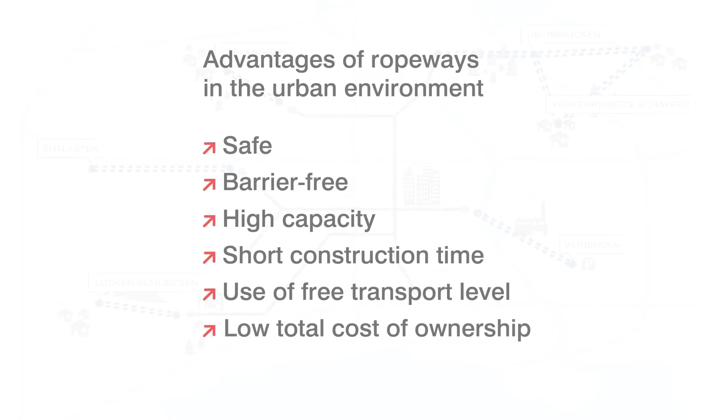Teraz przejdziemy do prezentacji dalszej.

Another dimension of urban mobility. Let me explain what we are doing at Doppelmayr in the cities. Doppelmayr's board was convinced to create a new team especially for urban installations, to trigger this business, because we are convinced that this will be the future. Right now the turnover is about 10%, and we hope to increase this number. Of course, it will never be the main market for our business.

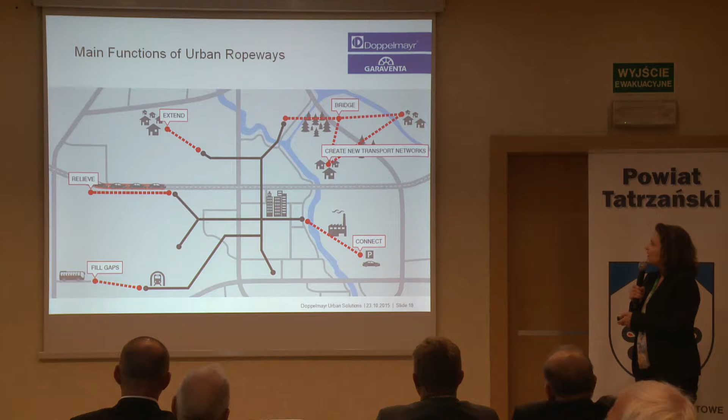One big advantage is the new level. We work on a different level. The ground levels in our cities are congested, so we move from level zero to the first level—a free level not used by other means of transportation.

Another very important advantage is the short building phase. Let me give an example: in London, construction took 11 months. When my colleagues first looked at the site and started planning in Austria, that was 2 years before the system opened. It's a really short construction phase, which politicians like because they can show infrastructure realized within one term.

Another absolutely important thing, one of the key elements of urban transportation, is accessibility. A means of transport in cities has to be accessible to all passengers—not only the sporty, young ones, but also people who are handicapped, a dad with a stroller, old people—and that's where the cable car is a good means of transportation because it's barrier-free.

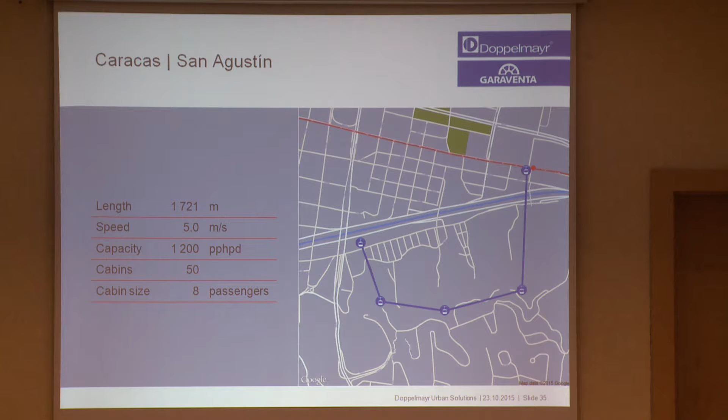Three years after, the government approached us a second time, and they wanted to extend the metro. The red line is the metro, and here we have a cable car going up the hill, really steep, from Palo Verde, that's the metro station, to the Mariche neighborhood up in the mountains.

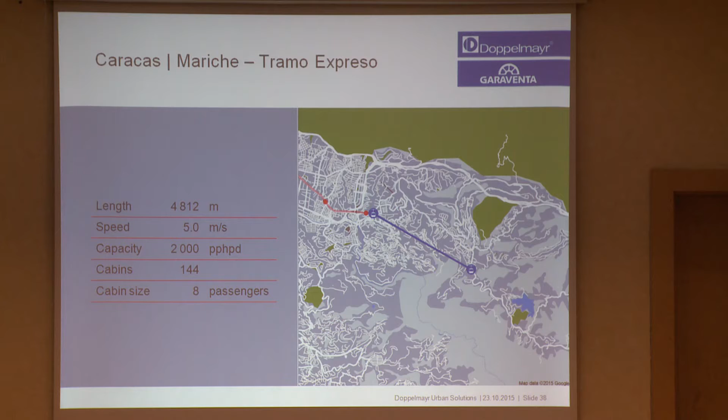Again, a very poor neighborhood. You can see it here, it's really steep. There's a road there, but it's always congested, and I was told it took people two hours to get there in rush hour.

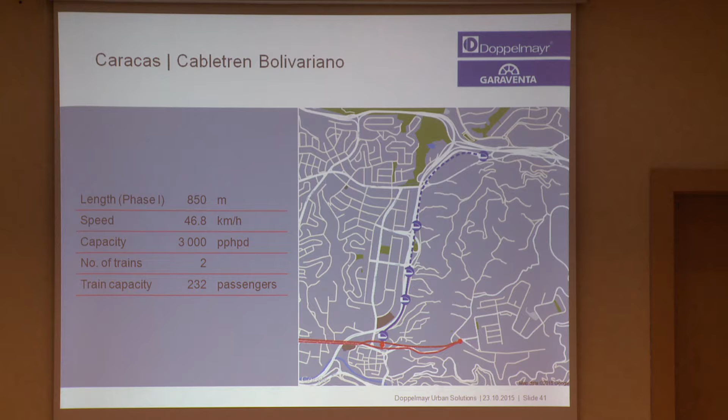So you can see here, you have seen this train in the movie. It plays an important role.

They wanted, actually, first they wanted to have an underground there, but then they realized the soil is not good enough. So the city decided to have an APM solution. It's basically the same technology as a gondola lift, but the ropes are underneath.

Another picture here. You can clearly see that the cable installations are integrated into the transportation network.

Next we go further down in South America to La Paz. La Paz is for us a really important step, because there we created a whole network of cable cars. For the first time in history, the cable car is the backbone of public transportation. This means that there was no infrastructure at all, and probably you know the situation in La Paz.

La Paz is in a valley, and the other city on top of the hill, a big city where the airport is, is called El Alto. El Alto is really poor, and La Paz is, let's say, the whiter, richer part of town. So these are two separate towns, and when Evo Morales came into power, he wanted to connect these two cities better. Since there was not much space on the ground, the only solution was a cable car.

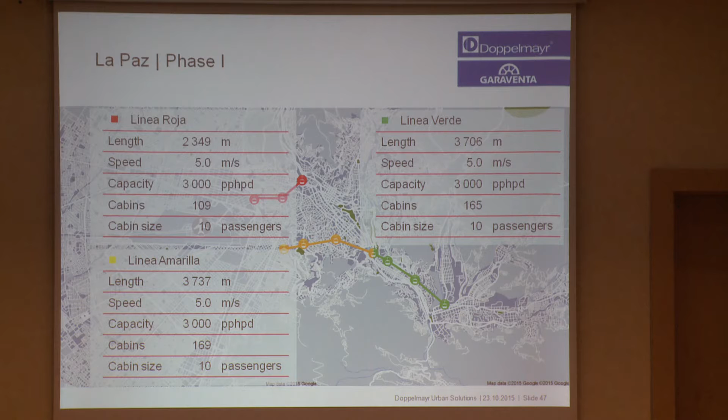The Línea Roja was the first to be opened. We opened it in April, and we were totally surprised that after 28 days we counted 1 million passengers, which is really surprising.

Here another pictures. I should probably mention the stations. The stations are really big because Evo Morales really wanted to have monuments there, and there are other services integrated in these stations.

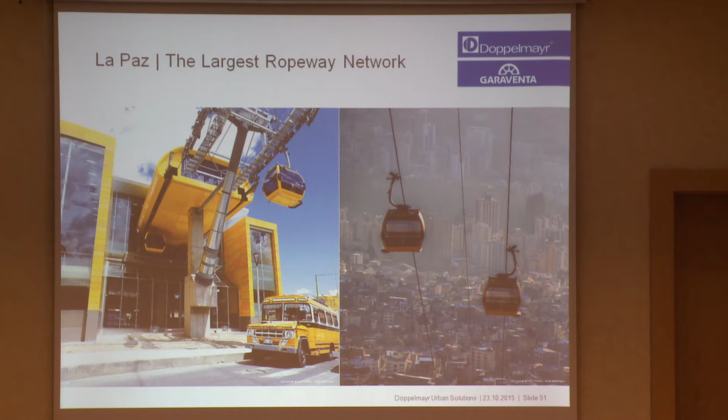This is the station where we changed from the green line into the yellow line. The green line was the last to be opened. We opened it in December 2014, and the green line is entirely in La Paz.

Some pictures here. It's really high up there.

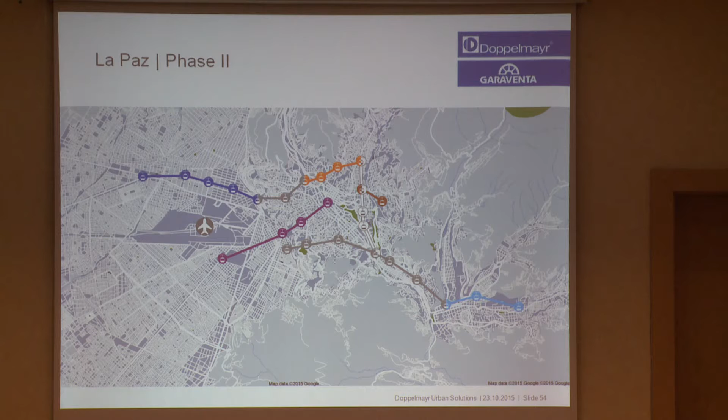We were awarded a second contract in March, and this is phase 2. Another 6 lines will be opened.

Línea Azul, Línea Naranja, they all have colorful names.

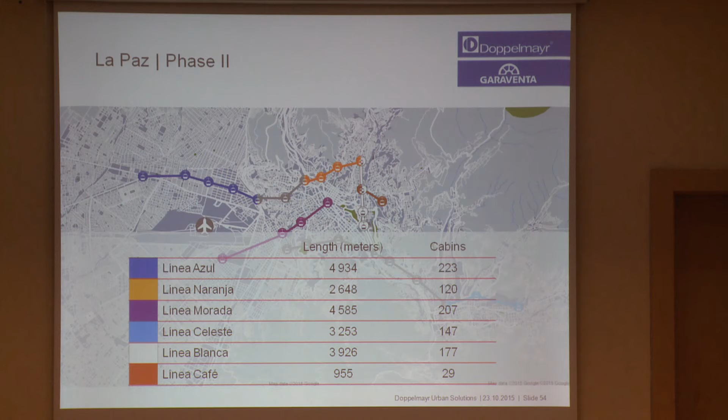In the end, there will be a cable network with 9 lines, 1,346 cabins, and 27 stations, and we will transport 26,000 people per hour in direction. The operating hours will be 17 hours per day, which is a big difference compared to the opening hours of skiing installations, and this is quite a challenge for our operations team.

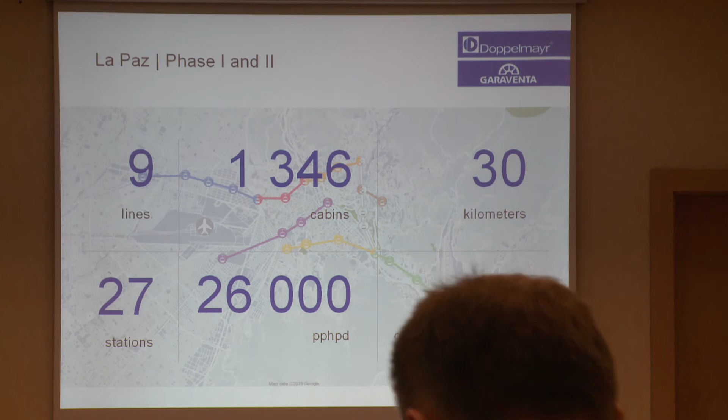We don't operate La Paz. The system is operated by Mi Teleférico, which is government owned. But they're really doing a great job.

Next, London. You've probably heard about this installation. It was opened right before the Olympic Games. It connects the Greenwich Peninsula, where the O2 Arena is, the biggest amusement hall, with the Royal Docks, where there are many new apartment buildings and offices. This line is the first connection over the Thames. It's about a 10-minute ride.

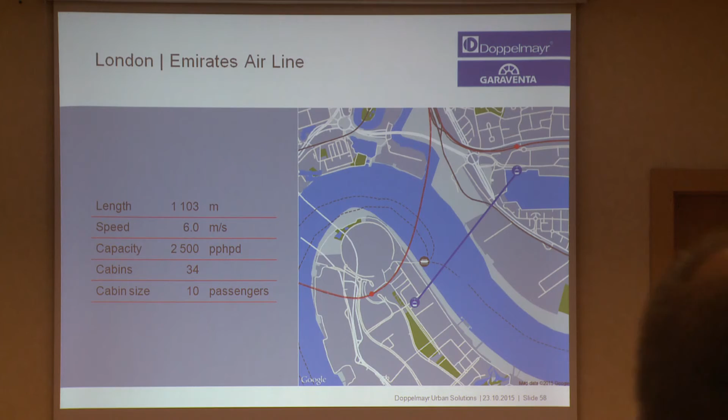Right now there are many tourists there, but it's integrated into the bigger picture. It's integrated into the transportation network of the London Tube Station, and it operates from 7 to 9 p.m. So it's a really urban installation.

Here you can see it, in the eastern part of London. You can clearly see the cable line on the city map.

Koblenz, as you all know - pardon me?

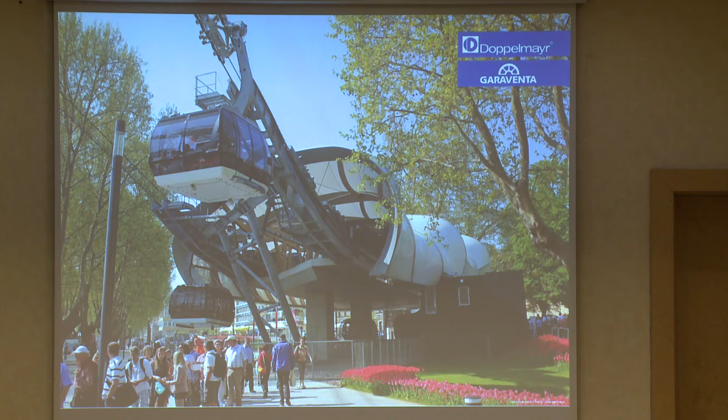Koblenz is important because it opened its doors for the National Horticultural Show, the German Horticultural Show, which is an important event in Germany. The Germans and the Dutch apparently are crazy about horticultural shows. So the problem here was how to connect the sites of the horticultural show.

You have the River Rhine here, you have the city, which is protected by UNESCO - really old, beautiful city - and here you have the castle. The problem was how to connect the two sites, because around the castle there was also part of the horticultural show.

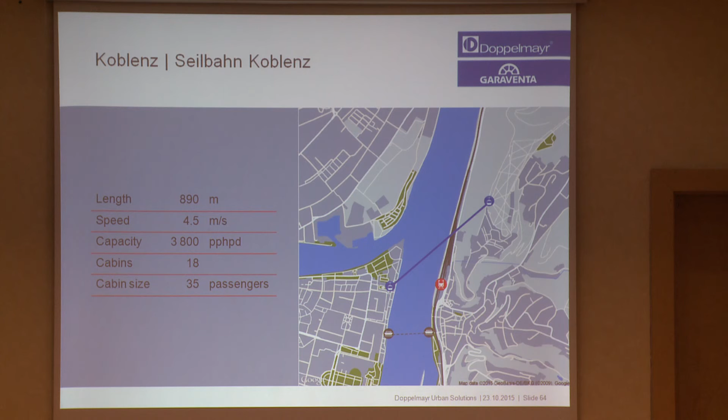So what we did - you see in the really nice picture - I have to mention it's what we call a top-notch 3S system. The S is German for rope, meaning here you have three ropes: 2 track ropes and 1 haul rope. So it's much safer. The wind stability is there. It's the most modern cable car system.

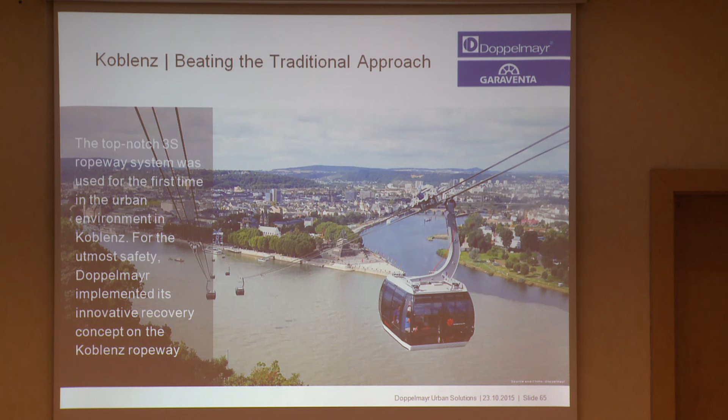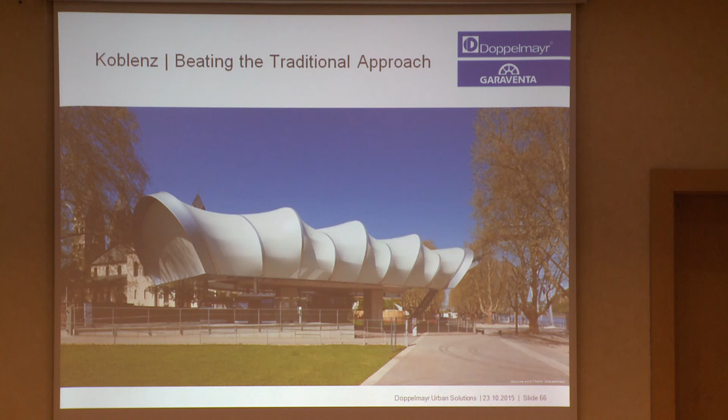Worldwide, actually. New architecture, this is really around the UNESCO site. UNESCO wasn't happy in the beginning, but now they think the cable car doesn't destroy the view and doesn't destroy the UNESCO site. We also tried to come up with a new cabin design.

This looks more like a bus, not like a typical cabin of a skiing installation. So here you see the site again - that's the bus, would have been the bus, the starting point of the bus, to the Buga up at the castle.

So now the cable car should come. Obviously, it's the much better solution.

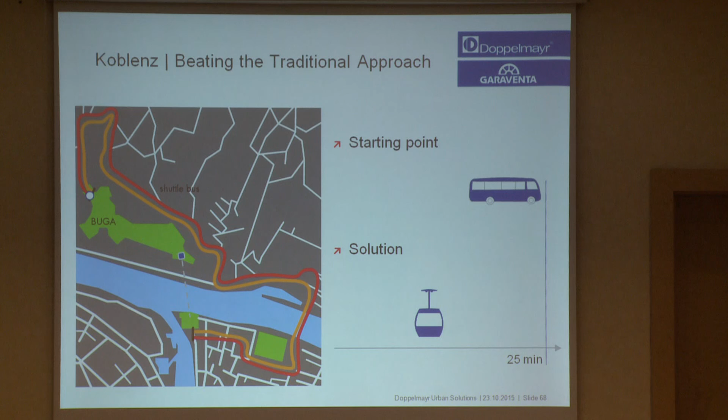Something really interesting: the cable car there was meant to stay only 3 years. We own it and operate it ourselves. It was meant to stay, as I said, 3 years, but the people of Koblenz wanted to keep it. So we kept it, and now they are really happy about it because it really triggers the tourist industry.

We have a letter from the mayor of Koblenz saying he is pretty sure it helped the tourist industry in Koblenz a lot, since the number of people staying overnight really increased since the Buga and since they have a cable car - it's another attraction and makes the city of Koblenz more attractive to tourists, apparently.